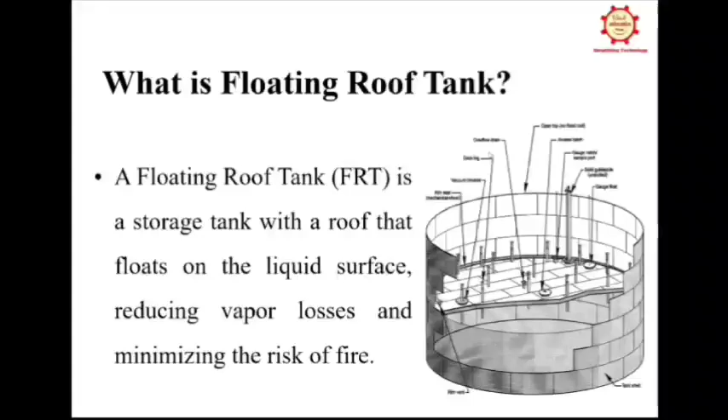To design it, we again use API-650 only, but the concept is different from what we use for cone roof and other types of roof. Here also we have two different types of floating roof tanks. One is the internal floating roof, which comes inside. There is a complete cone roof, the top is completely closed, and inside there is one more float, which floats on the liquid.

So whatever gases there are will be controlled by this floating roof, and there is still a gap. So that nothing falls on top of it, the roof is closed like our cone roof tank. And one more type is the external floating roof, where there is no roof, only the deck floating on the liquid. I think you can see my mouse, no? So this is one, and this is the external floating roof tank.

Both are used to avoid the formation of gases. The first one is used in fewer places, where the cone has to be made and the float has to be made, so the roof cost doubles. But it is normally used for gasoline or crude oil, where gas formation is much avoided. The other is again closed, but the top is open, so one roof cost is saved. This external floating roof type is used for hazardous chemical storage or refined product storage.

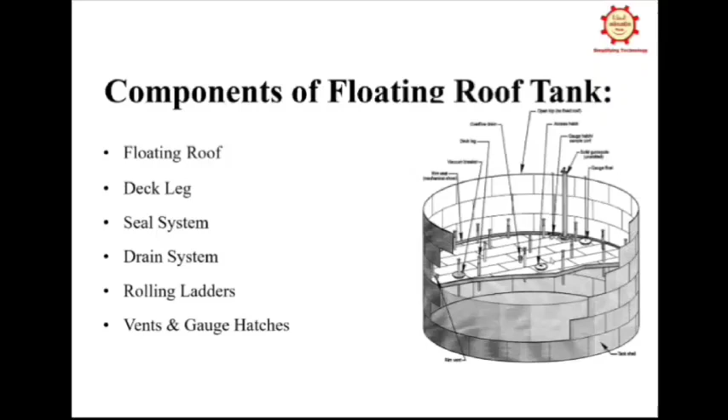So if you can see, this is one. This is called a single deck. Here you have this deck, so this is the single deck, meaning one plate is there, and at the end there is a float, what we call a pontoon. Inside this is completely air, it's a completely closed one. Due to this air inside, it holds the complete top plate so it floats on the liquid.

So whenever your liquid is filling, due to this float or pontoon, the deck plate goes up, and whenever it comes down, the deck comes down. As you can see, this is the draining system, so the liquid goes into this drain. And whenever the deck comes down, these are the legs that hold the deck, so it stops and doesn't hit the bottom.

Similarly, we have some manholes on this one, and some pontoon manholes also. There is some gap between these two, and due to this gap some gases may form. To take care of that, we have rim vents, so gases that form here can be vented through the rim vent. And there are pontoon manholes, roof supports and bleeder vents, which are similar to our vents, so whatever gases come can be vented through here. And some gauge hatches. So this is the single deck.

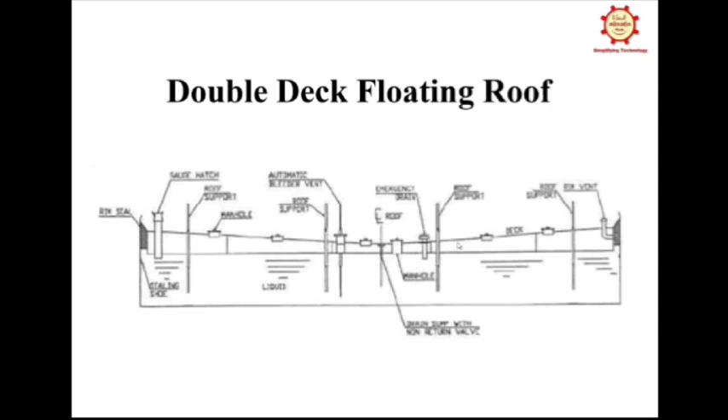Ravi, my question was that, one is that the weight of this roof should be held by the pontoon volume. That one I understood. But how will they decide the thickness of this deck, how much it should be? For that, is there any calculation? Yeah, there is a calculation.

If you refer to the appendix in API, there is some calculation given for the floating roof tank. As I told you, they will verify it with whatever roof weight is there. For that roof weight, how much should the size be? The left side, how much height? Right side, how much height? This pontoon height, how much size? All that information is available there.

So accordingly, we have to calculate, and they will also verify that, since it is circular, if one part fails, how the other part will take care. Like if one pontoon is punctured, how the others will take care. This is also given there. Okay, that I understood.

How will they calculate this deck thickness? I mean, what are the loads considered? As a roof load, similar to how we consider the roof load in a cone roof design. I think somebody's message mentioned appendix C and H, it's already there for this floating roof. If you refer there, it says this is the weight to be considered to calculate.

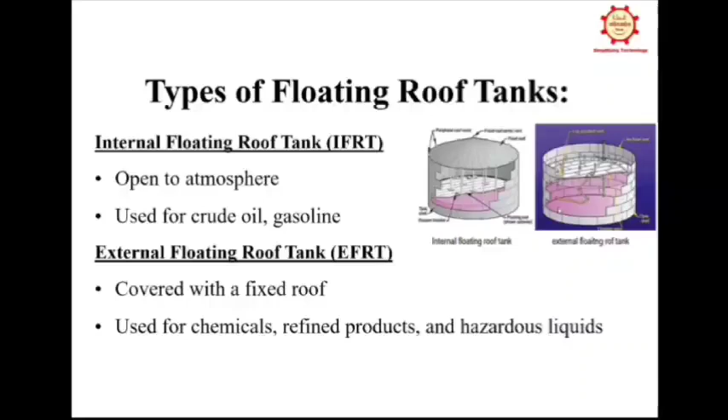I'm just concerned about the selection of floating roof type: double deck roof or pontoon roof. So in case of large diameter, we require a kind of rolling ladder, correct? Yeah, a rolling ladder is required down to the top of the roof. So for that, I think the L by D ratio is to be considered. How is the ladder provision provided?

The ladder will be provided depending on how much the roof comes down or up. So again, as you said, the ladders are required in almost all tanks whenever the roof floats. And L by D ratio is not for the ladders. I have some other things to show you. No, commonly what I heard, the ratio should be less than 1. So a rolling ladder is provided.

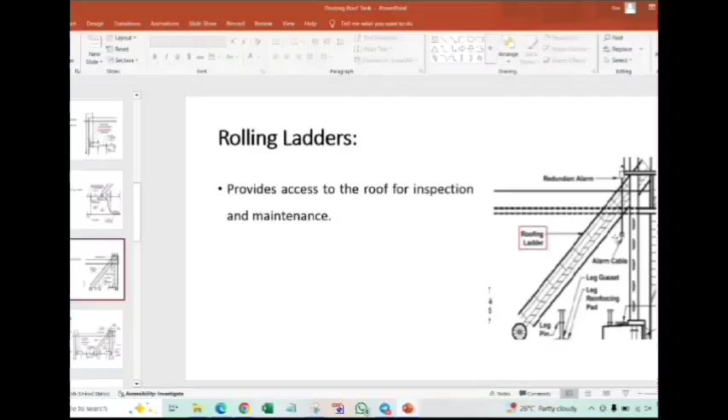Rolling ladder, as I'm showing you. Correct, rolling ladder. When your deck comes up, it comes up along with it, and whenever it goes down, it goes down along with it. But it doesn't depend on your diameter, because you can see here it's required everywhere, even with a pontoon type, because of how many nozzles and vents there are and the maintenance you want to do. At that time, this rolling ladder is required.

So the rolling ladder is required whenever you need to go for nozzle maintenance, whenever the roof is down and you want to do some maintenance there. Otherwise, how will we do the maintenance? Almost every floating roof requires this rolling ladder; we haven't come across one without it. And no L by D ratio for the rolling ladders.

For the requirement of pontoon type, normally we go for double deck above around 15-meter diameter, and below 15 meters we keep the pontoon type single deck. Are you clear? One doubt: does the weight of this top roof impact the shell or bottom plate thickness?

Top and bottom plate thickness with this floating roof design is similar to what we do for the cone roof. We do it the same way, considering the weights and total weights. But in a cone roof, normally at the end part the cone comes and sits. That is not there here, because this is considered as one part, since the roof moves anywhere from top to bottom.

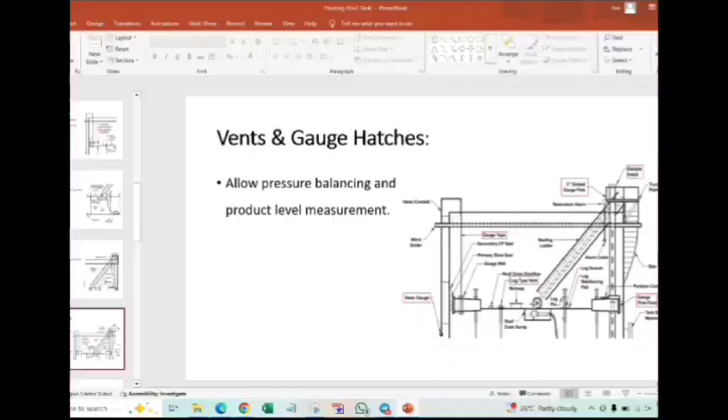Okay. Any more? And regarding the ladders, I couldn't understand how we can be able to land on the roof if it is down. If it is down, as I told, here there is a roller. You can see this one. This is the roller. Yes. Okay, it will be on the inside of the tank? No, not inside. It is on the roof. This is the roller, on the roof.

Yeah, okay. Whenever it goes up, this roller comes to here, to this end, where the pontoon comes. So accordingly, whenever it comes down, it comes back here. So it is rolling on the deck. So accordingly, whatever length we decided, it comes till the end: whenever it's up, it is the left end, and whenever it's down, it is the right end.

So it's moving on rails; there are rails on this deck. It's on the roof. On that rail, this circular roller is moving, and accordingly this ladder is up. It's just going forward and backward. So you can just climb, and you can go down wherever the deck will be. Like that.

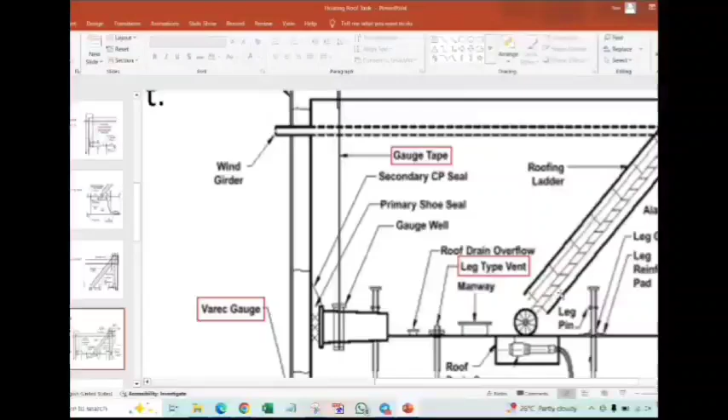Okay, understood. And this is the drain. So this drain is also something like that. You can see it in this picture. So this is the drain. Whenever it goes down, there is a flexible pipe for this drain. So the flexible pipe goes down, and whenever it goes up, this flexible pipe goes up along with the deck.

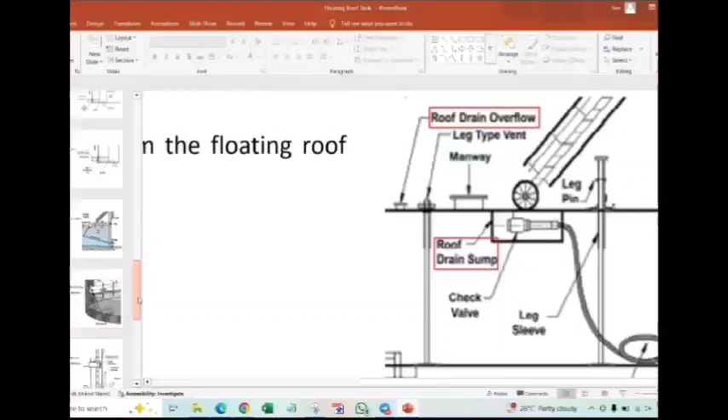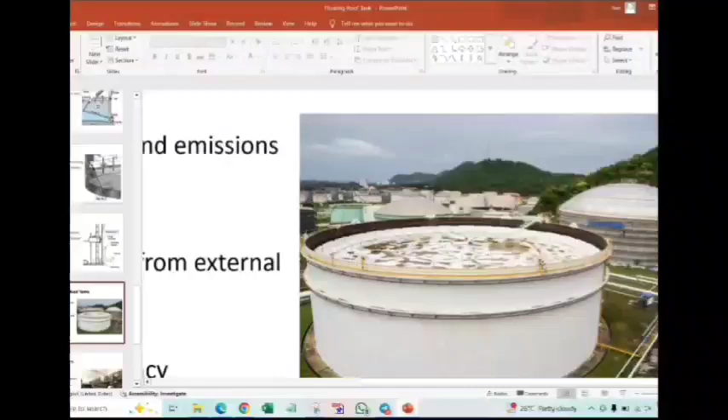Okay. Let's see, maybe here, ladders. Yeah, you can see here. These are the ladders. Are you able to see? Yes, sir, I can see. Yeah. So these are the ladders where you can come. And here is the rail for it. So it goes front and back. Whenever it goes down, it moves front and back on that rail.

Okay. Ravi, could you please explain the selection criteria for the vent, the design of the vent nozzle over the roof? Yeah. So for vent design, as I told you, whenever your tank is down, this deck comes and sits at the bottom. At that time, when the liquid is draining, gases come inside through that vent. So the gas inflow versus the liquid outflow should be calculated based on API 2000: how much gas is coming in and how much liquid is going out, so that they are matched.

Again, whenever liquid is filling in, because this deck is sitting on these legs, there might be some gases or vapors inside. That pushes out whenever liquid is coming in, so the gases go out. That calculation is given in API 2000. So accordingly, we have to consider the liquid inflow and liquid outflow and calculate the vents for this.

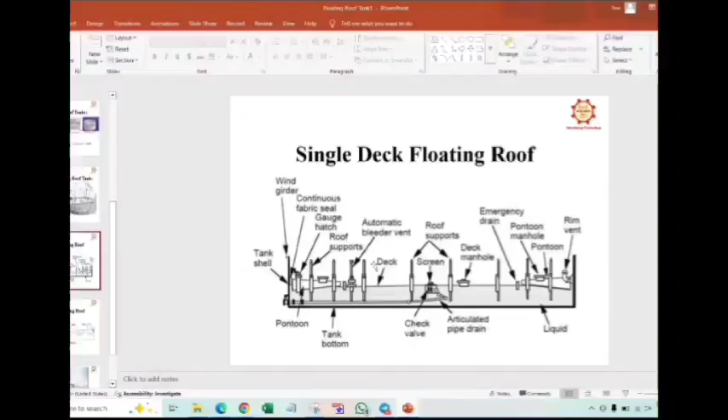Okay. Anything else? So whenever the deck comes down or up, it's moving on this. See, these are the rolling ladders. This is the vent, where it's going out here. When you are filling liquid from here, as it fills up, whatever gases there are go out from there.

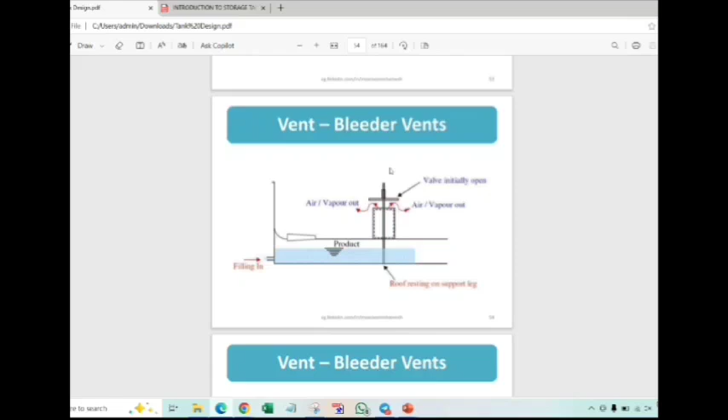So again, you have to calculate. And when you're taking out, the vice versa. The gas is coming in here from here. Okay, Ravi. Thanks.

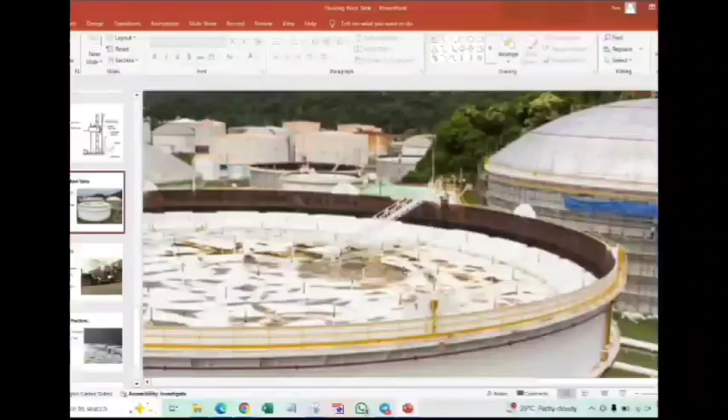Any more questions on these tanks, or we will move to some other topics? Or if anybody wants to share something, they are welcome. Just review. So you reviewed this floating roof and that pontoon puncture also, no? How many pontoons to be punctured, and then...

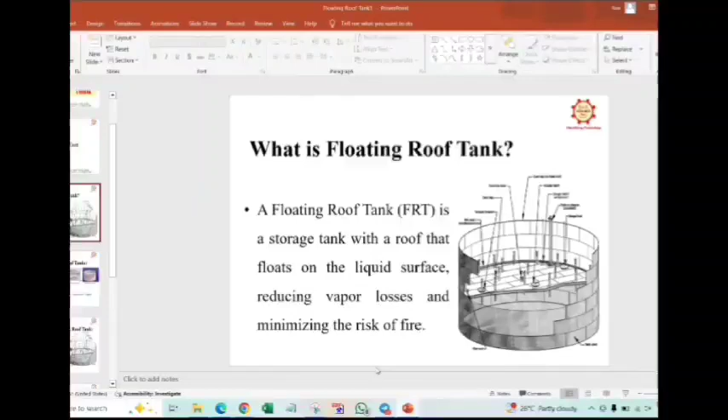Yeah, that roof part will be by a different vendor, and the tank is by a different vendor. Okay, that was the case, and it was the internal floating roof. So there is a top roof also by another vendor. So cone type, another one on top there. Yes, so that is another vendor.

So the design and supply, or only the design with one vendor and supply with another vendor? It was designed and supplied by another vendor. The scope for the roof is by another vendor, and the tank shell and bottom plate is by another vendor. But is the design by the same one who is manufacturing, or by some engineering consultant? By the manufacturer. Designed by the manufacturer only. They are designing and supplying, and they gave it to you just to review.

So what are the issues you found in there? Any comments, or any mistakes? Yeah, there were some comments about the code they selected for the calculations of the roof. They have their own design. They have not yet submitted the detailed calculations, so I gave the comment to submit the calculations. Rest of the things are okay. And I have found these vent calculations also. As you said correctly, it is as per API 2000.

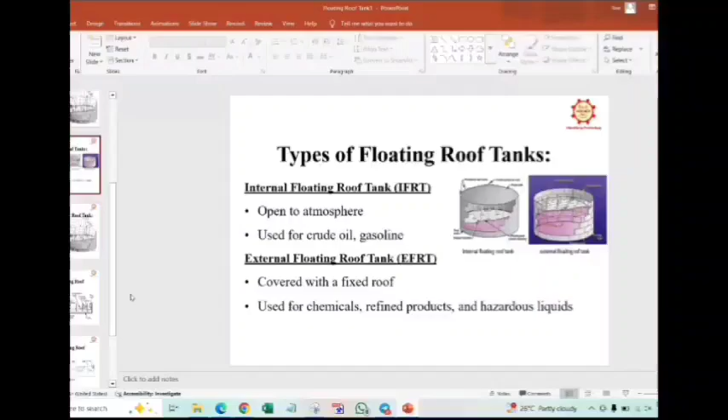Anybody done any floating roof tanks here? What tool will be used to design the floating roof? The software. For that we used Excel only, but now many are saying that E-Tank and other tank software are there. They also can do it.

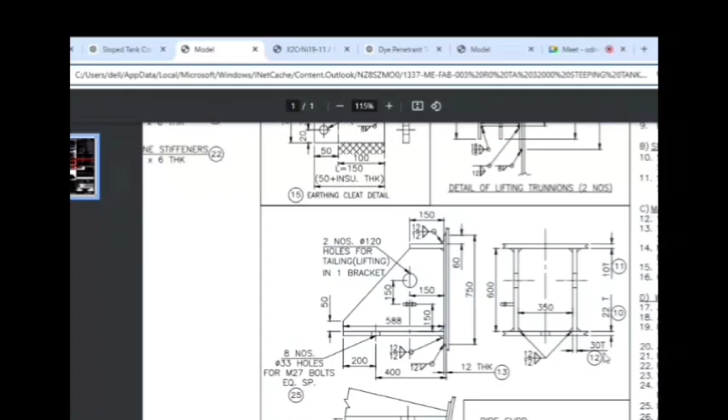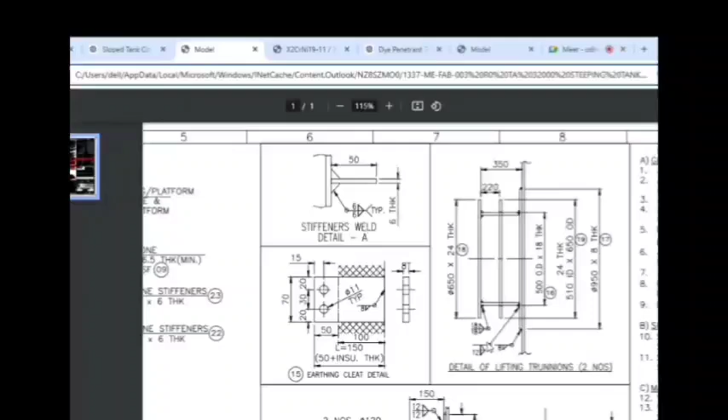It is maintained as 22 and 10 mm thickness, and the trunnion also has a diameter of 650 and 24 thickness. I have to check this with available standards or engineering practices. So how should I make sure whether this design is right or wrong? I'm not sure on this. Anybody want to answer?

This is a tank which has a diameter of 6.5 meters and a height of 12 meters. It's rested on ring supports on the structure. So it will be like this. It is mounted on a full ring, and will have gussets, 12 numbers.

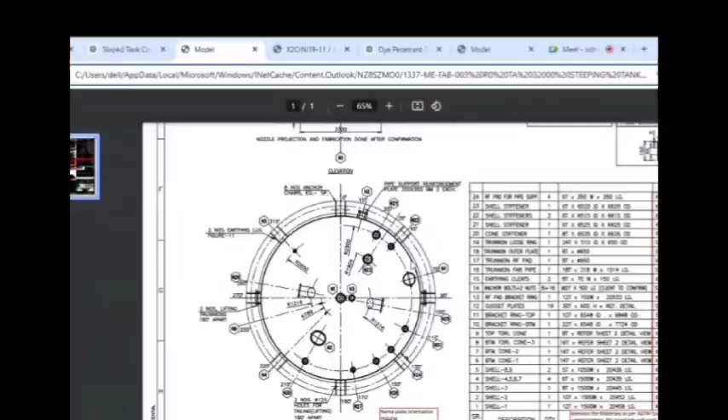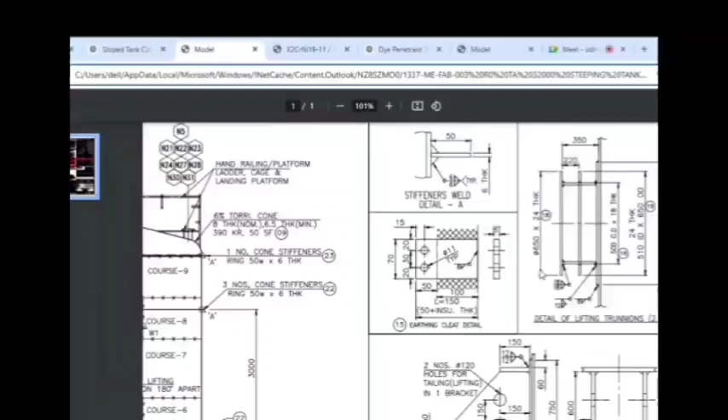So this is the... Yeah. So Stalin, if I understand your question right, you want to know how to design your support and how to design your trunnion, right? Yes. So which software are you using for this? This one, PV Elite we are using. Yeah. So in PV Elite you can design, no?

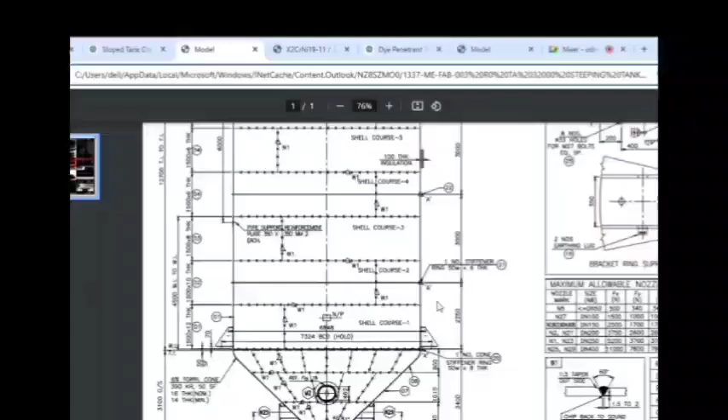You can design that. Actually, PV Elite is specifically for pressurized vessels or something. This is just an atmospheric tank. It is not having more pressure. Still, you can do that. You can use PV Elite, no issue. Yeah, if I use PV Elite, I'm getting the thickness of the base plate or some supports as more like 36 mm, 41 mm, something like that. So how to optimize that one?

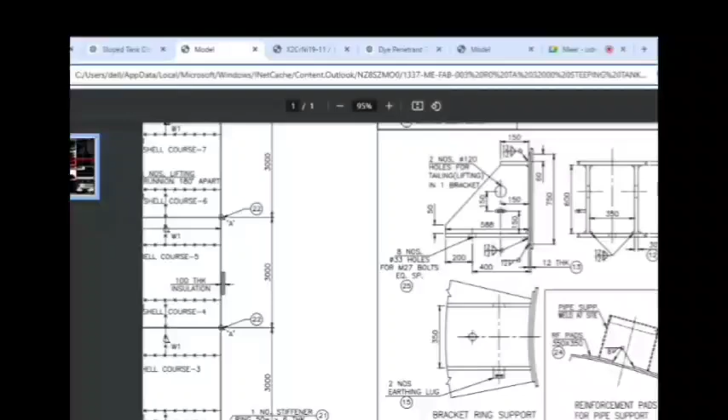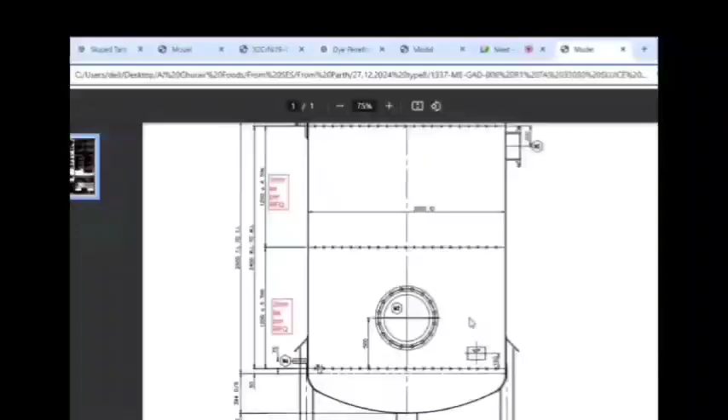I'm not sure on that. If I open another model. So if you see this model, the height of this shell itself is 2400, and the diameter is just 2000, but it is having a base plate of 26 mm thickness. Yeah, often the thickness is because of your anchor bolt also. What size you have given, it depends on that also.

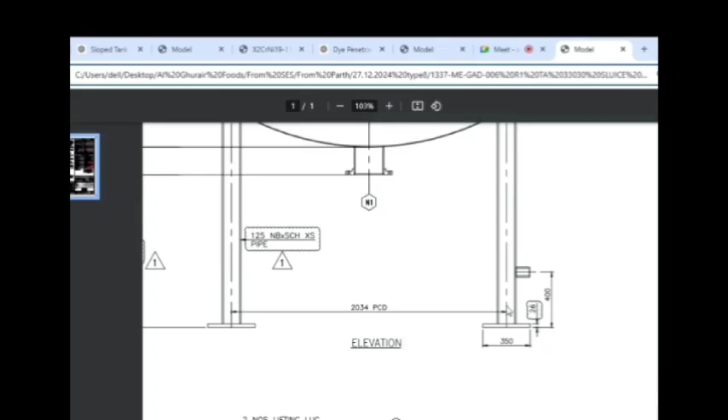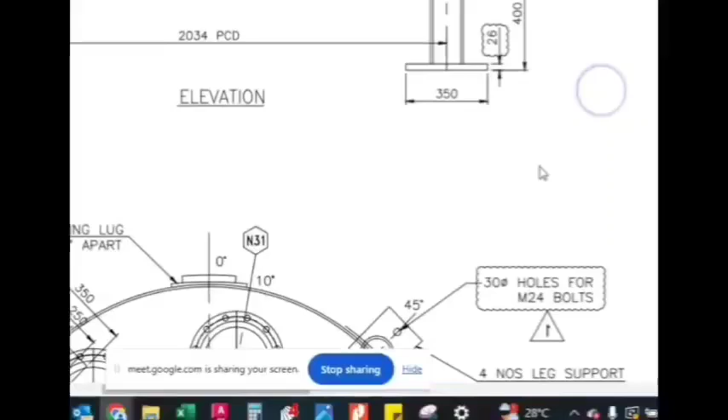Okay. Yeah. So in industry, generally people will rely on PV Elite only. But if you really want to optimize it, you can do some manual calculations. There are books available. You can refer to those, maybe Bednar or something like that, and you can verify. Okay.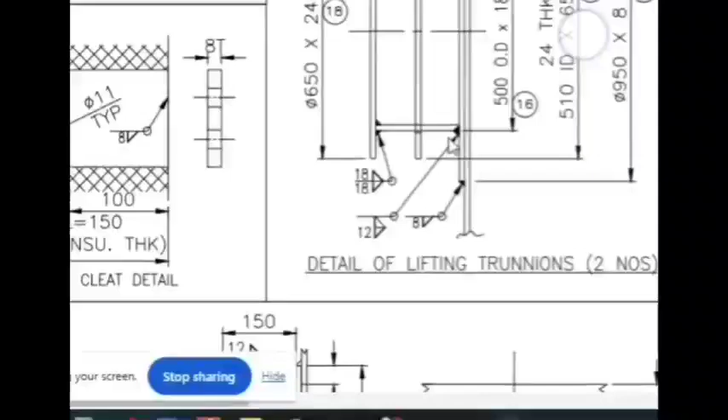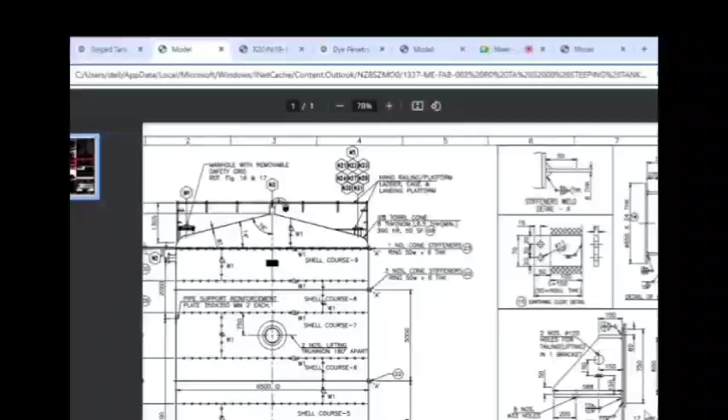Stalin, your issue is how to arrive at the values for this trunnion, or the complete vessel? No. Actually, he is looking to optimize the thicknesses. This was done on the basis of EIL design considerations. So you want to optimize only this part, or the complete vessel? Only this part, the rest of everything is fixed for now. That looks fine. Only I'm not sure on this trunnion and the supports.

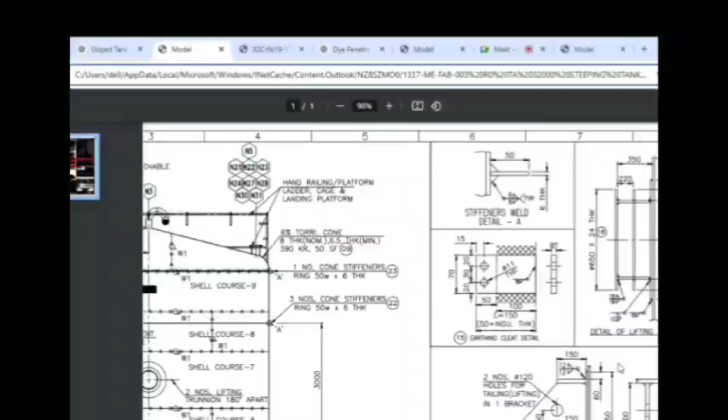So the trunnion and that support, even if you go with PV Elite, the sizes come more because wherever there are pressure parts, the pressure governs that part's thickness, because it takes the ASME Section VIII higher factor. That's why the thickness comes more than in an atmospheric calculation, where the thickness will be less.

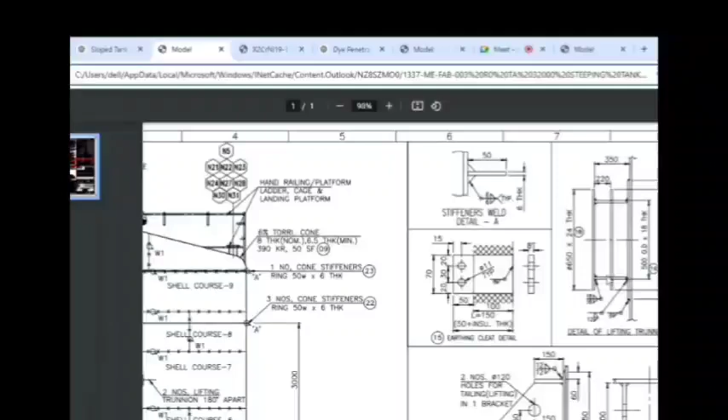But this trunnion is not considered with the higher design factors. So you can reduce that one by using FE or any other software where the thickness will be minimum, where the factor of safety considered is less. By using that, you can reduce the thickness and optimize things. But Ravi, looking at the size of the tank, it seems to be not very high. Yeah, but he wants to just reduce one part. We can do it in this one.

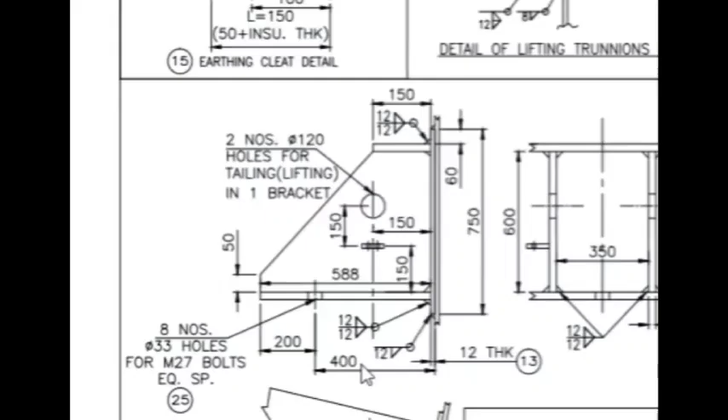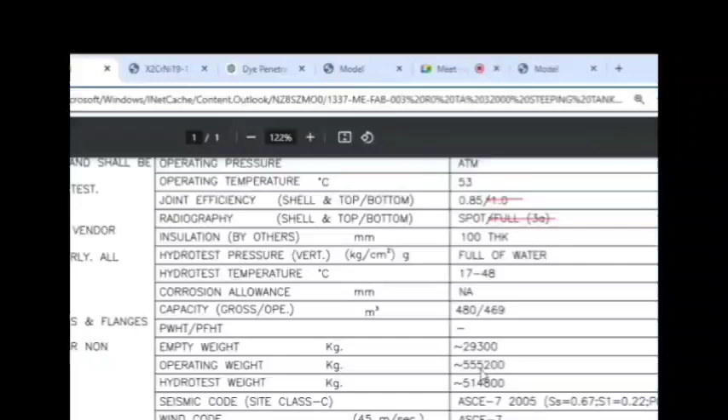He wants to reduce the trunnion and maybe the lug support. What's your empty weight and operating weight? The empty weight is 29 tons, sorry, 30 tons, and operating weight will be 55 tons. But for 30 tons, it may look okay. I mean, why do you want to optimize? I don't know, but

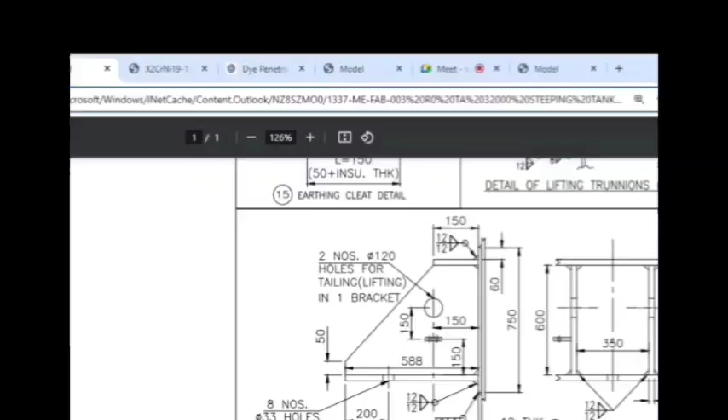you are having this projection, everything looks fine. The projection is around 2 feet. Is it usually like this? I'm not sure on this. Just want to confirm from your experience.

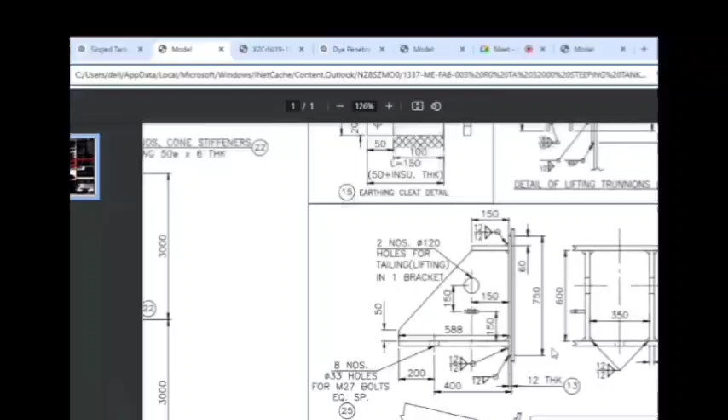Optimizing again depends on how much weight we have to consider, and whether it can take that weight or not. That we have to see, and again the calculation comes. If it passes, then only we can say it's okay and go reducing it. But for me, it doesn't look very high. Maybe it is okay. Maybe if you do analysis, you can save a little bit.

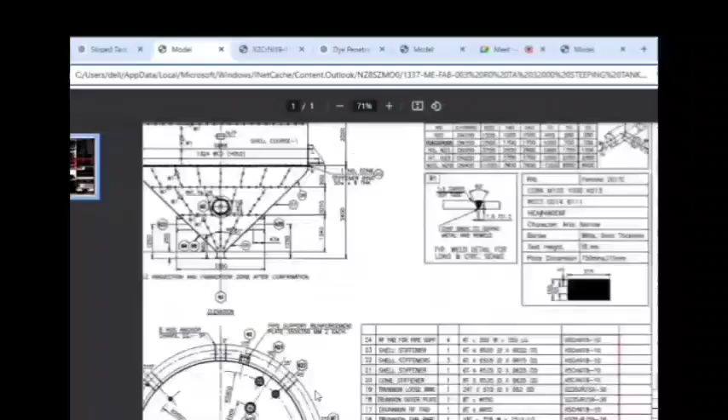But these brackets and the trunnion are not that much weight compared to your complete equipment weight. It's just a small part. So even if you optimize... Actually, this bracket is covering the overall tank circumference, so there is some impact in that.

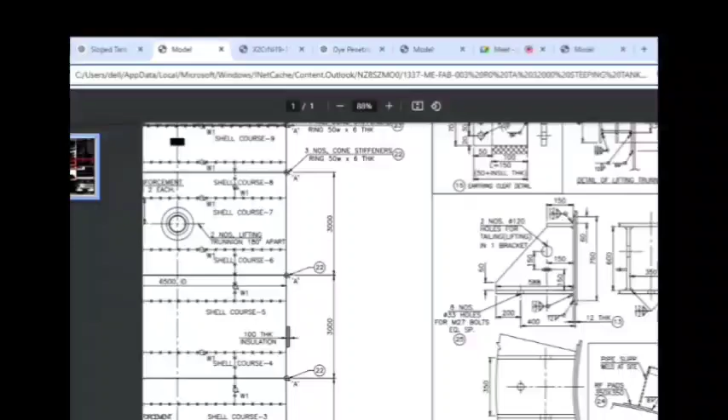Okay, you can refer to some standards also, like ADNOC standards or EIL standards. There you can find directly the size, for how many tons which trunnion size can be selected. By that also you can see whether it is okay or not. Otherwise you can do it with software. Okay, any more?